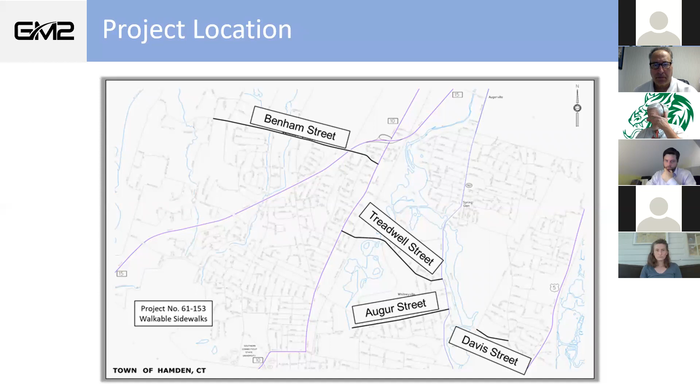So this particular project involves 4 streets in the town of Hamden: Benham Street, Treadwell Street, Augur Street, and Davis Street. A little bit of background on the project: the scope of work on each of the 4 streets stems from 2 previous studies that the town undertook several years ago. In fact, many streets were involved and studied as part of these 2 studies, including the 4 streets subject of tonight's meeting. Several projects have been initiated, including this one, as a result of the outcome of those 2 studies, and there's a fair amount of public engagement, which means we think we've got some good, sound project goals to achieve.

And those project goals include pedestrian safety, improving pedestrian safety by constructing new sidewalks where none exist today in priority locations. We also hope to improve facilities for bicyclists and some strategies for traffic calming.

So of the 4 streets, let's talk about Augur Street first. This is an aerial view. Augur Street is primarily a one-way street. The full stretch is from Whitney Avenue to Newhall Street in the east-west direction, and it's one-way westbound from Frederick Street to Newhall.

On this particular street, there are some missing sidewalks. In the lower left-hand corner of the image, you can see white stripes indicating where we would be constructing new 5-foot wide concrete sidewalks in the vicinity of Farnsworth Street, Rolfe Street, and Giles Street.

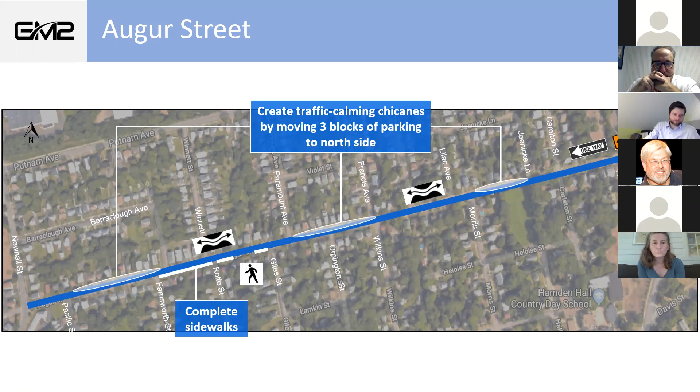One of the other elements of work on Augur Street is some traffic calming. In this case, we're interested in creating what we call a chicane effect. I'm toggling back and forth to show how we would like to restripe some of the on-street parking. The parking today is on the south side of the street, and we're proposing to restripe 3 areas on the north side.

This graphic shows the chicane effect. By shifting some of the parking to the north side and leaving some striped on the south side, we create horizontal shifts in the path of motor vehicles as they traverse east to west down Augur Street. This horizontal shift ought to help encourage slower speeds. So that's the traffic calming strategy on Augur Street.

Treadwell Street. The full stretch is from Whitney to Dixwell Avenue. On the western portion, from the vicinity of Martin Terrace to Marne Street, there are no sidewalks today. The project proposes to construct a new sidewalk on the north side in that stretch, providing a continuous stretch of sidewalk from Dixwell to Whitney.

In the rest of the project area, we're proposing what we call sharrows. These are pavement markings on the roadway in each direction, indicated by a symbol of a bicycle with 2 arrows. They're commonly called sharrows, indicating a shared lane environment, and I'll show you that in a minute.

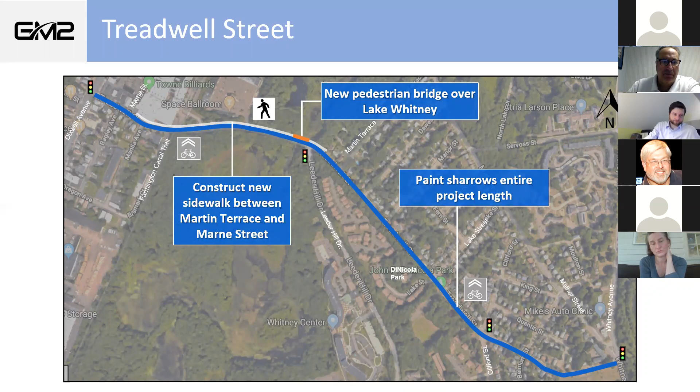I want to point out this little orange area just to the west of Leeder Hill Drive. This is an area where there's not enough room for a new sidewalk within the existing pavement area, so we're proposing a new pedestrian bridge to carry pedestrians over Lake Whitney.

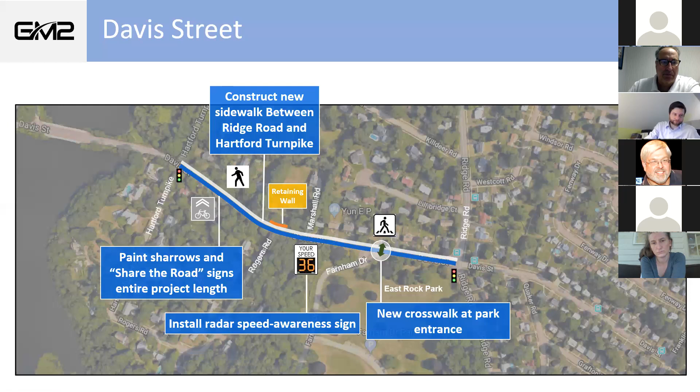We did investigate the most recent 5 years of crash data. We did not see any crashes there, but I think there is some history and concern of safety at that driveway, so with new pedestrian activity, a crosswalk makes a lot of sense.

We'd be proposing at the sidewalk location what we call rectangular rapid flashing beacons, or RRFBs. You may have seen these in other municipalities, or even in Hamden, but they're fairly new. In the past several years they're being installed at mid-block crosswalks, where a crosswalk doesn't have the benefit of a traffic signal, and the law requires drivers to yield to pedestrians in the crosswalk.

These flashing lights are activated by the pedestrian, so they're not flashing all the time, and they've been found to be very successful in increasing compliance with the yield-to-pedestrian laws. So we propose those to be installed at that crosswalk location.

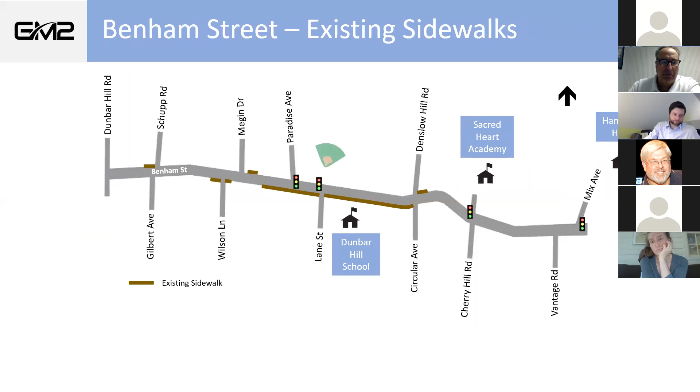We did an investigation and a study, and had a public forum a month and a half ago. The town recommends the new sidewalk on the south side in that stretch, and then there's another small section near Dunbar Hill School on the north side, opposite Lane Street. There's an existing crosswalk that appears to serve that athletic field, so we're proposing a little new stretch of sidewalk to receive pedestrians at that crossing.

Today, Benham Street does not have striped shoulders, just a double yellow line. So we would stripe the 5-foot wide bike lane, leaving 11-foot travel lanes eastbound and westbound, which conforms to standards for this type of roadway. We think that would have some traffic calming effect - the appearance of a narrowed roadway with that white stripe and the exclusive bike lanes.

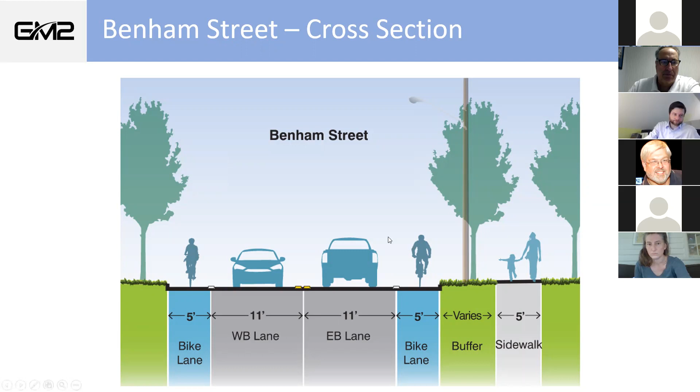And these 5-foot wide bike lanes, one in each direction - we can fit the bike lanes for the most part between Dunbar Hill Road and Mix Avenue. We're going to have to do a little bit of widening right around Cherry Hill Road - just not quite wide enough, there's a little pinch point - so we're going to widen the roadway a bit to have those 5-foot wide bike lanes be continuous.

Now, when we get to Mix Avenue, the stretch between Mix Avenue and Dixwell Avenue, there is not enough roadway width. So we're proposing, rather than exclusive bike lanes, these sharrows on the pavement markings, providing improved bicycle facilities the full stretch between Dixwell Avenue and Dunbar Hill Road.

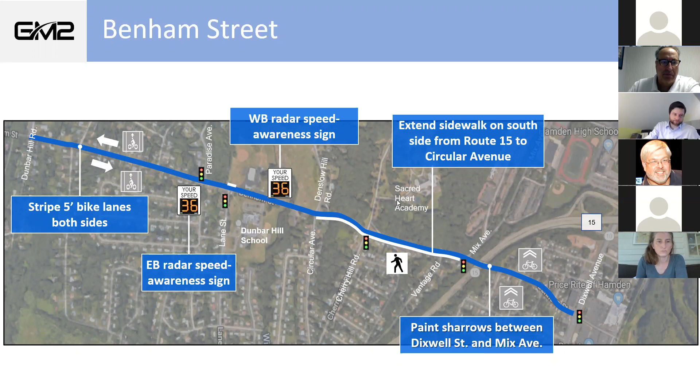Similar to Davis Street, we're proposing these radar speed awareness signs, one for each direction. We're suggesting they go at the approaches to Dunbar Hill School, a very sensitive area for pedestrian safety for the school children, so that's what we're also suggesting for some traffic calming.

So I've covered the 4 streets and a little bit about property rights. The vast majority of the work will be accomplished within the town-owned rights of way. We do have several locations where it appears that while the sidewalk work will be on town rights of way, because of the topography in certain areas, we think the town will have to acquire some slope easements. Primarily, these are easements where we're going to have to change the topography to fit in the sidewalk. So it's not an acquisition of a fee taking of property, but an easement.

Anyone who is interested in their particular property, I have highlighted which properties are on some colored plans, and I believe they've also been posted on the town website. I can go over that in a minute, but I need to read you this information first.

The process of acquiring property under a federal aid project, which this is, needs to conform to what they call the Uniform Relocation Assistance and Real Property Acquisition Policies Act. It goes all the way back to 1970. So that's the federal law, often just referred to as the Uniform Act. The Connecticut Department of Transportation, CTDOT, will be providing oversight of the town's rights-of-way process, because the federal funding is being administered by Connecticut DOT to the town of Hamden.

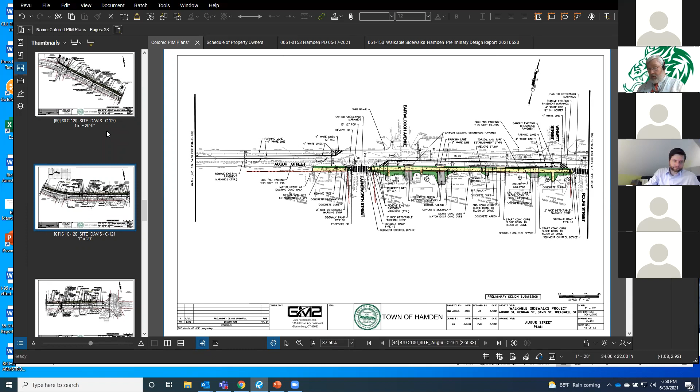Second one is Mike Mendelson. I am writing to express my support for sidewalks on Davis Street as currently presented. I think that sidewalks and a crosswalk to East Rock Park are sorely needed. That's what Mr. Mendelson gave.

And we just this afternoon received another letter. Mr. Austin, I am writing regarding the proposed sidewalks on Benham Street. We strongly oppose said walkway on our property. We work hard to maintain our property and do not want to lose our fence and our plantings. It is very unfair that after over 25 years, we now risk losing the fence and gardens we invested in to accommodate imaginary walkers. The biggest foot traffic we see is the Sacred Heart students running on their side of the street.

Due to high unsafe traffic, children do not generally walk to school in this area. Sidewalk or no sidewalk, with the speed at which people drive, it is very unsafe. Secondly, you are putting an additional burden on taxpayers to clear ice and snow at risk of being fined. Hamden does not do a good job of maintaining the existing sidewalks, so let's not add to the unmaintained sidewalks in this town. This $3 million would be better spent on crime reduction and enforcing traffic laws. I am sure you don't care about what long-standing taxpayers want, but we do not want this on our property. Our taxes go up and we get things forced on us we don't want, and the things we need are ignored. Also, our gas line to our home is where the sidewalk would go. Please place the sidewalks on the Sacred Heart side and leave the residents alone.

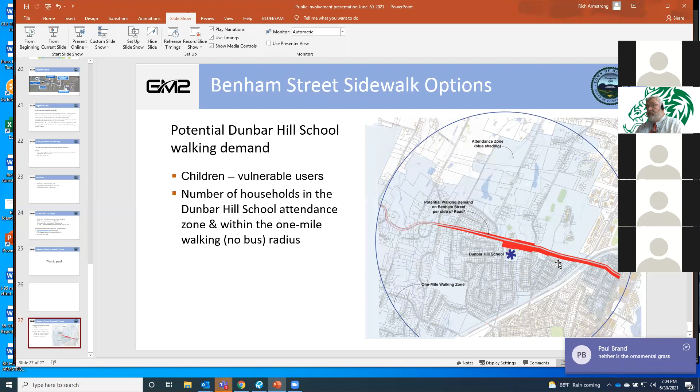So we did this study, I don't know if hopefully you can see this graphic, let me pull it up. So this graphic here, the red band, this of course is the south side of Benham Street, and then the red band on the north side of Benham Street. This large geographic area is the walking zone, the 1 mile walking zone for students at Dunbar Hill School. I think it's an elementary school, young students, and they can't take a bus, they're either going to be driven by a parent or they're walking.

So the desire, or the demand if you will, is indicated by the band width, that red band, and there's simply more residences, households on the south side. You can see it's less populated on the north side, and these bands are proportional to what one would expect, the volume of pedestrians on which side of the street. You can see there's a greater demand on the south side.

Now having said that, that was but one consideration, but I think it's an important one, because school children, whether they're driven now or whether they're choosing to walk, or whether they will choose to walk when sidewalks are constructed, we believe the greater demand is on the south side. So that was a strong consideration.

But excuse me, there are bus services to Dunbar Hill from this location. I know because I live here and I watch the buses pick up the kids. They don't walk from Vantage Road to Dunbar Hill, they take a bus, or their parents drive them if that's what they choose. There are no walkers, they're not required to walk here. So that doesn't even make any sense in this area.

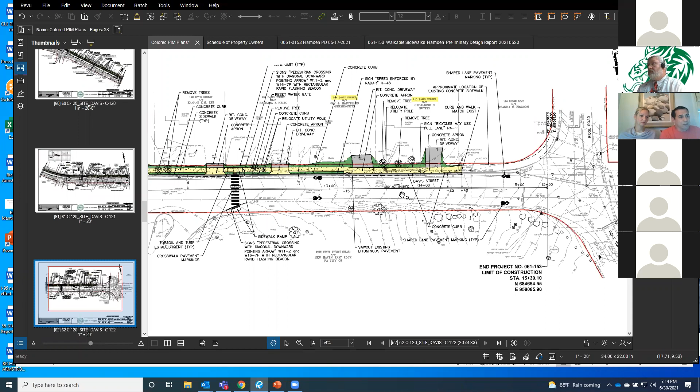So to put a light, which would end up, by the way, directly in front of my house on Davis Street, with a flashing light for someone to cross versus a red light at an intersection that gives a walk sign for someone to walk across, does not seem to make sense to me. The rapid flashing beacons seem fine for an area where you can't cross at a light, but you have those options at Hartford Turnpike and Ridge Road.

Last meeting, we talked about one of the holdups being paperwork needed to build sidewalks in a park. It seems like we've had plenty of time to put in that paperwork, and it sounds like we still have time. I am proposing that it is certainly not equitable to put in a sidewalk impacting 12 homes with half the lot size versus 4 homes with literally twice the lot size. 8 of those 12 homes you're impacting are a quarter acre or less, and that doesn't seem very equitable.

We also talked about, I believe Richard had said off the top of his head, and I wouldn't hold him to it, that the cost between the north and south side was about the same. I've lived here now for 15 years. Traffic is - people drive extremely fast on Davis Street. You're at a hill in both directions to cross into the park. We literally do it almost every day during COVID to go for a walk in the morning, did it this morning. It's a great location to live, but to have to cross directly where cars are coming up hills and can't see you is very, very dangerous. I would propose the sidewalks go on the south side, impacting 1/3 as many houses, and would ultimately be safer, where people would cross at intersections where the lights turn red and have a walk or don't walk sign. I don't know if you wanted to add anything.

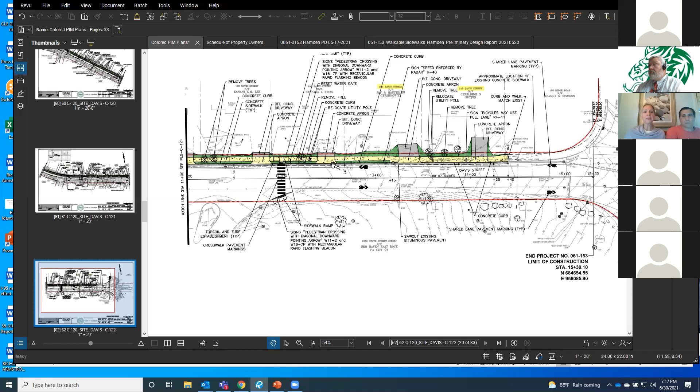Those 12 homes are also substantially smaller with smaller lot sizes. So you are significantly devaluing homes from people of lesser economic means, while also privileging those precious 4 homes with economic means. In no way is this plan mindful in terms of the growing disparities and wealth gap that already exists in Hamden. Please be mindful in terms of thinking about equity, and also trying to be as least disruptive to as few homes as possible.

There is a park across the street. Wouldn't it make more sense if the sidewalk was on the same side as the park? That is where people are going. You have natural places where you can cross at the intersections where people cross anyway.

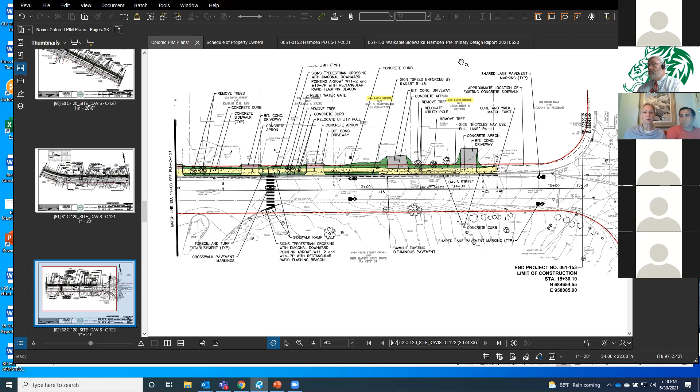I'm also a runner and a cyclist, and I go all the time running on Waite Street, and there is a crosswalk on Waite Street. And yet I've also been almost hit by a car twice because of the same reason, right above the hill, near the soccer fields. It is extremely dangerous, just like Davis Street.

And I tell you, even with the crosswalk, and even if you had a bright, shiny sign, drivers don't necessarily stop. If they are stopped at a stop sign, they have to stop. So when you're thinking about safety, thinking about the types of cars that drive on Davis, it is a major throughway, as you know, from State Street to Whitney Avenue.

And my children take the bus, and we are very mindful of where they get dropped off to make sure that they're on the side of our house, because they cannot cross the road—even when our bus signs have the stop sign, people go through it all the time. It is extremely dangerous. Please, please don't endanger the public, and please don't further disenfranchise people who do not have the economic means. Thank you.

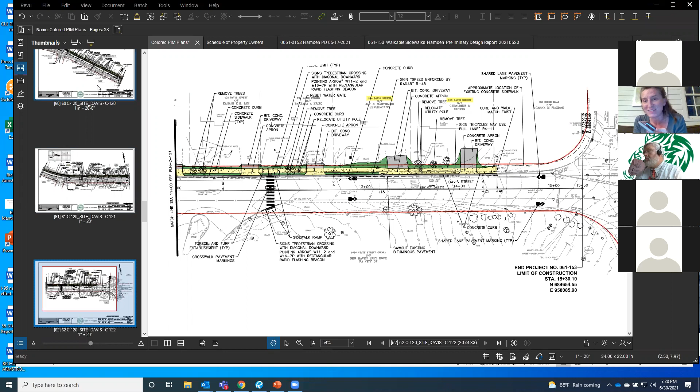I wanted to say that I'm a new homeowner on the corner of Davis and Hartford Turnpike. I'm on the north side of the street, and I'm glad to be meeting my neighbors here tonight. So I'm in the property that's marked Neumann. The map was made before I arrived.

In addition to the really important issues that were raised about safety getting to the park and equity, I wanted to raise some neighborhood concerns. One is about the traffic noise, and another is about the feel of the neighborhood. Both of these things, I think, depend partly on the shrubbery and trees that people have thoughtfully put into place to help manage the noise and keep the neighborhood beautiful.

I noticed that the plan involves removing 6 shrubs right next to my property and 2 trees, and that it continues along the street removing greenery. I think that would be too bad for this neighborhood, which provides a sort of archway visually to the park. Also, I think I, like my neighbors, have noticed the trucks hurtling through and other fast-moving bikes and things hurtling through at all hours, especially in the middle of the night. And they're loud.

For people whose fences will be affected, but also for those of us hoping that the greenery absorbs some of this sound, I'm not hearing that this plan is helping with traffic calming in our area very much. I'm not fully understanding why trucks are hurtling through at 2, 3, 4 in the morning—I'm routinely awoken by trucks hurtling along the uneven road, making a lot of noise. It's true on Davis, also true on Hartford Turnpike, but it seems to come a lot from Davis Street.

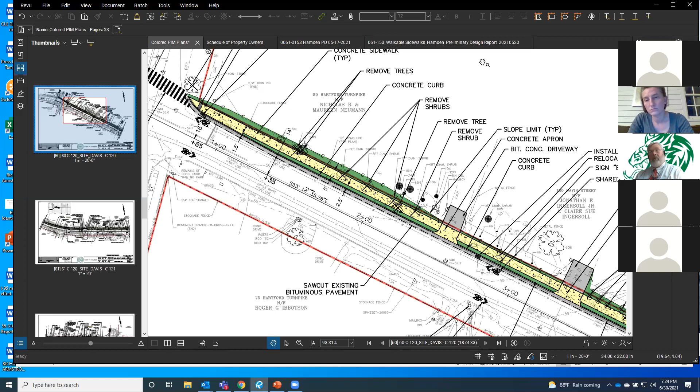Traffic, we do hear very loud and clear. The traffic authority is looking at this street, and we are looking at truck traffic. It's not an easy or quick answer. This is the only east-west corridor we have in town, so this isn't a good answer, and we don't have a great suggestion yet. We're working on it, that's the best I can do right now. I know the traffic authority is looking at it. We did look at it, and it even went to council, and council sent it back because this is the only east-west corridor. There's nothing to the south until New Haven, and nothing to the north other than purely residential roads.

until you get to Hartford Turnpike. They've cut Skiff Street off, and all the others are more circuitous. I don't have a good answer, but we are looking at it. There's a study out there commissioned right now. I hope that answers your questions, though I understand you may not find them completely satisfying. Keep in mind Route 8 is my back line too, so I hear motorcycles and trucks, and there's never going to be anything I can do about it.

Could you directly address which side of the road was selected and why on the Davis Street area? For all of them, the predominant reason was the study itself. The studies put it on Benham Street, on the south side, because that's where the majority of the users, meaning the collected area, were.

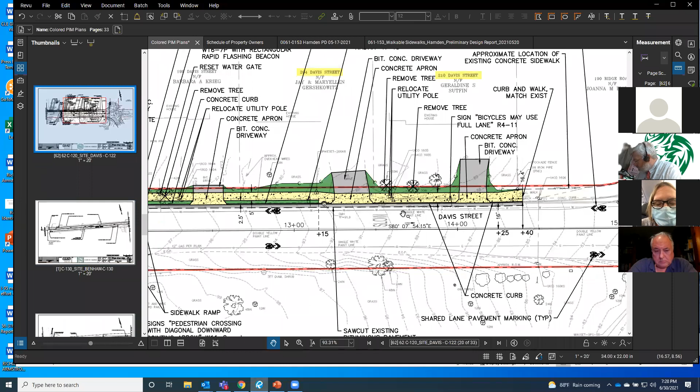But the other issue I wanted to bring up was the intersection at Ridge Road and Davis, where it's an inefficient light. There's a lot of waiting that doesn't need to go on. Cars coming from Hartford Turnpike south can actually turn right if a right turn arrow is added to that intersection. Also, I wonder if crosswalks can be added with lights, since there are lots of pedestrians using that intersection. It would be extremely helpful to connect our neighborhood with Whitneyville. Thank you.

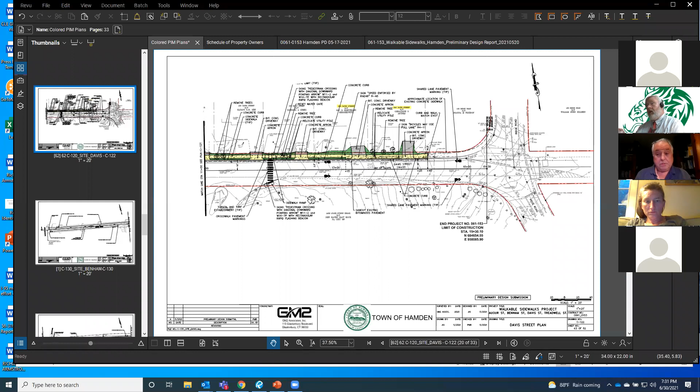There's a swale that comes down from the park, and that drains part of the park and comes next to his property towards Davis. So the first thing you need to do if you're going to do a plan like this is remediate that to the current standards.

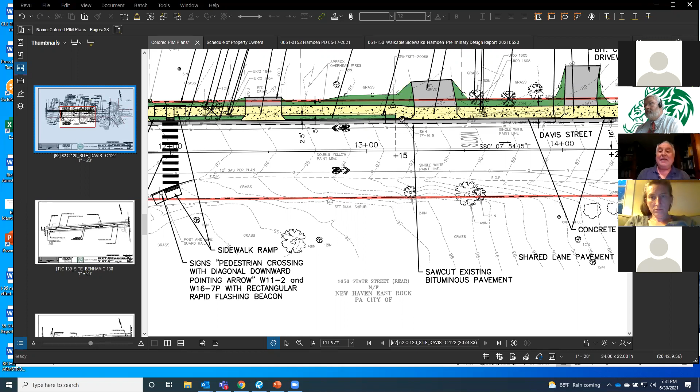Good luck getting New Haven to do their proper part of that, because they built all those parking lots up on East Rock. It all drains—they actually changed the drainage, if you can imagine, toward the reservoir instead of toward the Quinnipiac. But that's the kind of thing, and if you want to squabble and fight with New Haven, we could put this project back 5 years. So let me just say that.

There are a lot of impediments. The engineers have looked at this, and they've tried to balance the difficulties, equities, and costs. There are a lot of difficulties wherever these sidewalks are routed, but to run it on the south side is going to be extremely difficult. So if people don't want this project, you can try running it on the south side. That's all I have to say. I have a lot more to say, but in the interest of others, I'll be silent here.

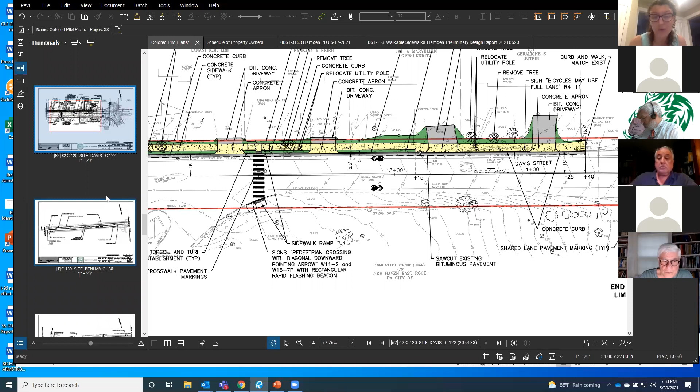We've moved into the property that was the Ortmans, so we're at 129 Davis Street, one of those 4 properties on the south side of Davis Street. We moved here from Cambridge, Massachusetts, and we've got 2 very young children. We love living here and are very glad to be part of the neighborhood now.

I would echo what's been said about traffic and traffic calming. If there are going to be more people crossing, and we see a lot of people running up and down the road, the speed of the trucks and lorries that come past is very worrying. We would be very glad of a proper crossing at the turnpike so we can get to either side of the house. Unless we're coming out in the car, and even that's a nasty junction sometimes, it's not very safe to get the children out and about.

So that's probably what I've got to add. I don't know enough about the plans yet, I'm just getting up to speed on the details of what's on what side. But in terms of concerns about traffic speed, vegetation, and littering, those are all things we experience very much too. We'll try listening and learning to what's going on, but for those of you I haven't met, we're glad to be joining you. Thank you very much.

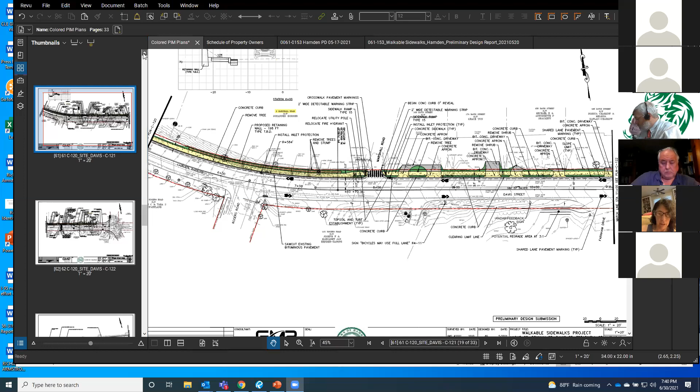Ms. Ward, I believe I had you next. A very quick question, I apologize if you covered this, I had to tune in a little bit late. I'm concerned about the intersection of Hartford Turnpike and Davis. If you're walking from Whitney over the bridge, it's really terrifying to try to turn right because there's no sidewalk in that last stretch on the south side of Davis. And if you're on the other side, you have to cross, and there's not a real pedestrian crosswalk. So do you already plan to have some pedestrian crosswalk there for that corner, the south side?

On the north side, there's an existing bituminous sidewalk, not great. We'll agree with you on that one. On the south side, if you want to turn, there isn't one. If you're on that sidewalk on the north side of Davis, going up to Hartford Turnpike from Whitney, you have to cross in order to walk in that neighborhood that you turn right off. You turn right on Hartford Turnpike to walk in that neighborhood, you have to cross that intersection, and it is terrifying.

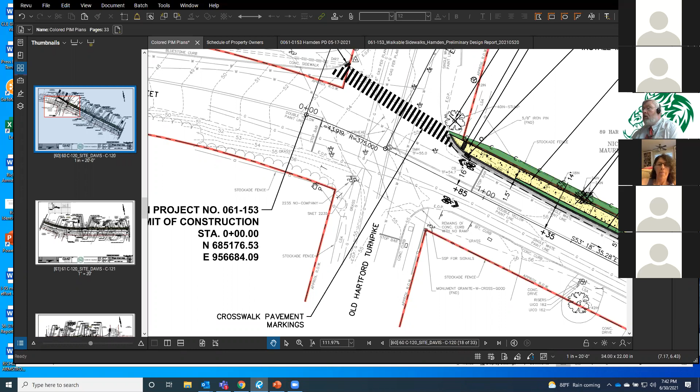And I just wanted to know if you'd have a walk signal there as opposed to just a stoplight, if you're proposing that. If we don't do it in this project, we will do it in the next. There is another project that I have also earmarked looking at Hartford Turnpike and calming on Hartford Turnpike and Ridge. I am hoping that the council passes a capital program that is hopefully going to be before them shortly. If they do, between this or the other, we will be looking at replacing that light. I don't know if the replacement of the light is here, but we're going to replace it at least in the next one. So it's not proposed in the project you're talking about tonight.

Rich, do you have that in ours? The challenge we have is that the signal equipment appears to be extremely old, and unfortunately the challenge is we may not be able to upgrade that existing equipment. We still have to make that final determination. If it's found that that existing signal equipment cannot be updated or upgraded because of its obsolescence, it's very, very expensive to put brand new signal equipment in, so it may not fit within this particular project budget. But as Mark said, I think his other plan would be to pursue other funding sources to be able to do that, so it's to be determined. Ideally we would have all the crosswalks and the PED signals, but we have to do a final evaluation of the existing equipment and see where we are.

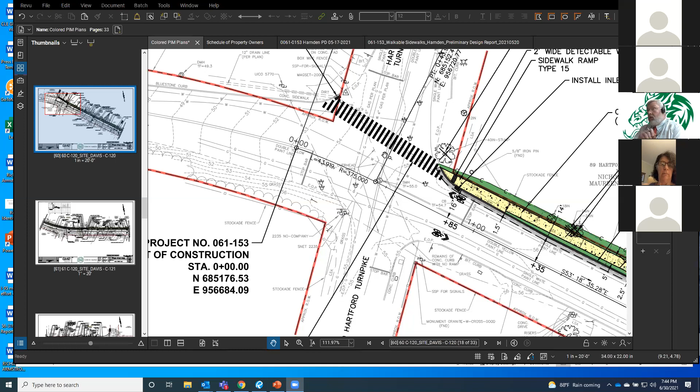We're working on it, we're chasing grants. I do have what's called a LOTCIP grant, Local Transportation Capital Improvement Program, that is looking at Hartford Turnpike and Ridge. That's another project this neighborhood will see, not immediately, but hopefully soon. So that I deliberately put this light in there if it's not addressed here.

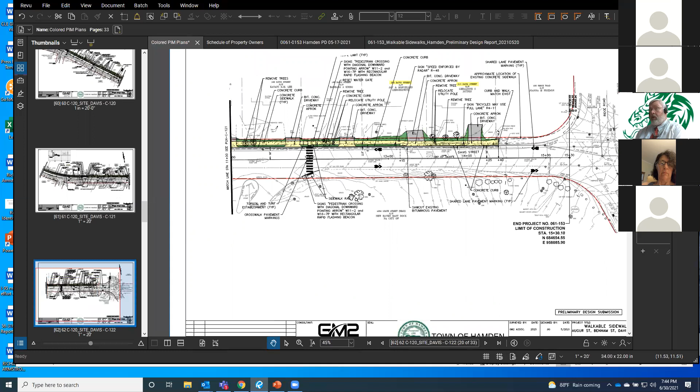And I did have two questions, I did not miss them. The park itself is owned by New Haven. It physically resides in Hamden, so it is considered part of Hamden. It is owned, the ownership of that park is New Haven, so that is correct.

Can I just ask a technical question? We can try. Earlier, Richard mentioned that he had highlighted properties that potentially required slope easements. Could you, Richard, please explain how you highlighted them?

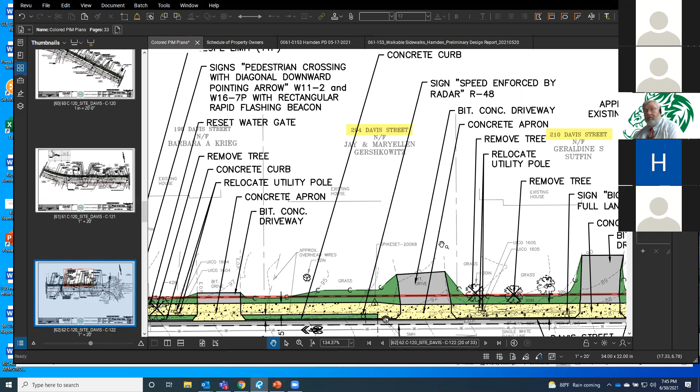Yes, sir, are you on Davis Street? I'm sorry, I don't recognize you. Yeah, so Mark has put on the town website these colored plans, so you want to look for the colored versions. For the properties that we believe will need some sort of slope easement, I've highlighted the street address. Hold on please, can you see my screen?

Yes, can you go over to 140 Davis? 140, okay, bear with me please. I'm looking for a street address, I'm not quite there yet.

Certainly, you can ask any questions, I'm happy to help out. So 140, yes sir, if we look at your property, under this proposed design you can see the sidewalk, you can see the topography. You have a steep slope, fairly steep slope. I know that, yeah.

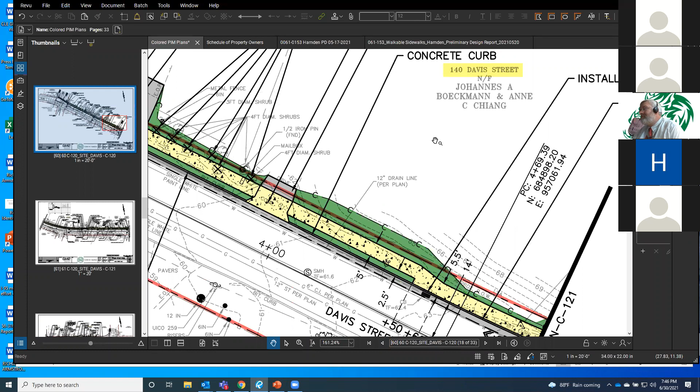You can see this line here that says C, that's the approximate cut line. So in order to build the sidewalk, we're going to have to cut into your property a little bit to fit this level area. The sidewalk will be level and then slope back up to meet your existing property grade and topography. So it will be regrassed, but it would be cut down lower than it is today. It might be steep enough that we need to get onto your property for construction purposes, and that would be a temporary easement somewhere in the vicinity of that line.

So once we're in final design, with this proposal, I was surprised to see that it doesn't mention any shrubs to be taken down, because there are shrubs or rhododendrons right in this area that we're looking at. Okay, all right.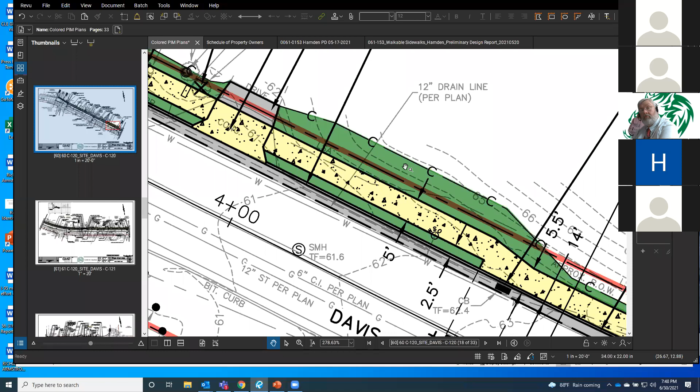So Mike Marzi can help answer this question. If and when the need for the easement on your property or anybody else's arises during final design, a property map would be prepared showing the exact easement area, and a property agent from the town would come out and meet with you, walk your property, and you can help them understand all the features that may not be depicted on this map. So there'll be an opportunity for you to give clarity on things like vegetation that doesn't show up on the survey map.

But you can see there are some trees, and also in that area is a water shutoff for the water supply. Okay, and I see a W in that plan. Yes, that's typically the water supply, easily 3 feet down, and I assume that will be maintained and taken care of.

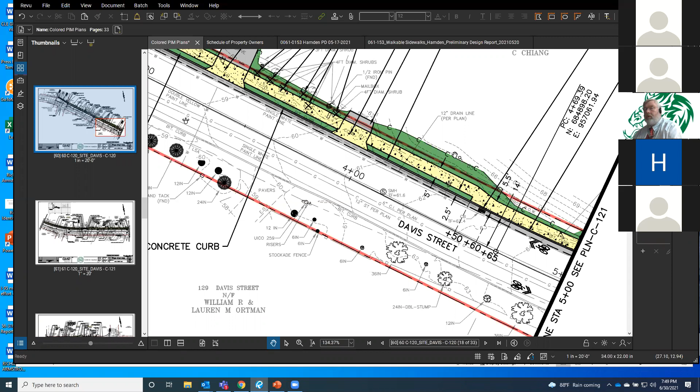Yes, absolutely. Someone else expressed concern about a gas line, I believe this was on Benham, and the gas line is easily 18 inches down. It's not common for us to encounter utilities when we go through, occasionally it does happen, but it's uncommon. If that's the case, we will relocate it at no cost to you, because that would be part of the construction.

I did also notice, Randy Teal, you could not see the plans easily because you're trying to look at it from your phone. If you go to hamden.com, you can go to the engineering tab on the left-hand side, scroll down, and there is projects. Under projects, it's close to the bottom, it's Walkable Sidewalks 61-153, that's where all these attachments are. So I hope that addresses your concern about the ability to see the plans and review.

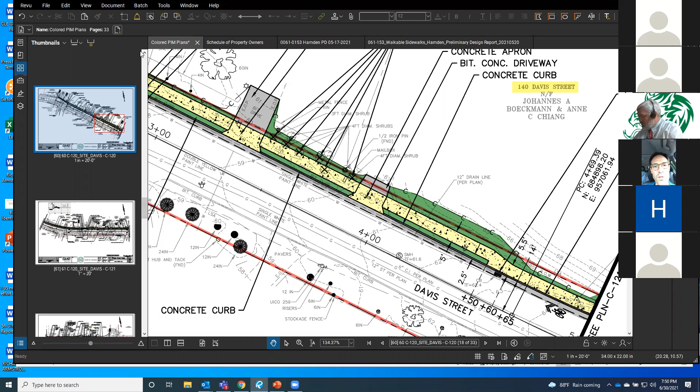Oh no, it's okay, but can I ask an easy question? Please. So back on the Hartford Turnpike and Davis intersection, I heard the conversation about the light being difficult to change, which I understand. There was a crosswalk on the drawings crossing Hartford Turnpike. Would it be possible to put a crosswalk crossing Davis there? Because I will echo Helen's comments that is a death trap of an intersection.

Yes, it's not always done. I don't know if that would require a change in the signal equipment, but a crosswalk the other direction would also be very welcome.

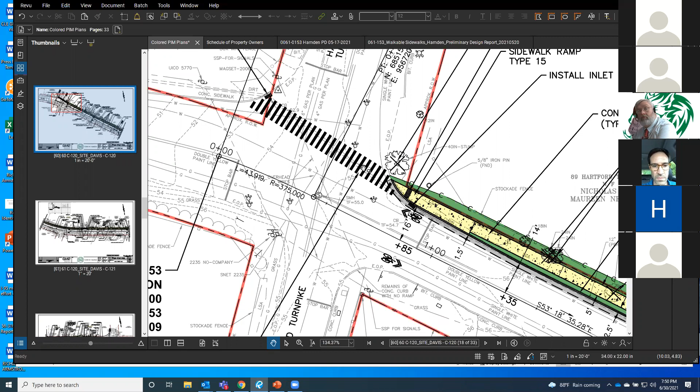Yes, that's a good comment, and we did talk about that. Hearing it from you and others emphasizing the importance of improving pedestrian crossing safety, we'll strongly consider that. I think that sounds like it makes a lot of sense in this circumstance. Thank you very much.

Also, when it comes to traffic calming, there are other grants in this area. I know there's been much concern about the traffic calming we did up on Ridge Road. That was very concerning to a lot of residents. It's not part of this project - it's actually just off most of these maps.

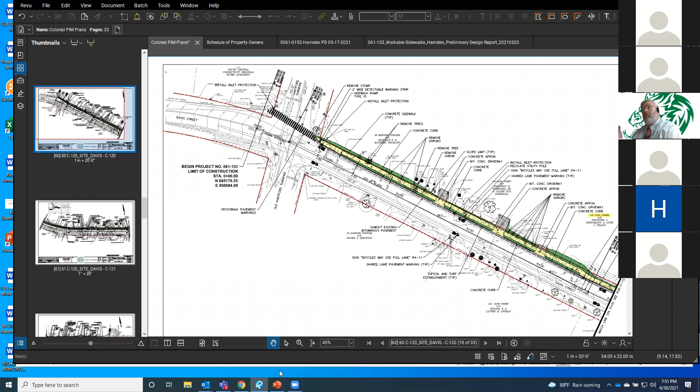We will be coming to you in the future for Hartford Turnpike and Ridge. I'm going to come to the residents even before I bring in consultants so that they can come in and bid on that project with those comments in hand. It's the same bundle of reports that have made various recommendations in this area, so we are looking at that.

There is also another project on the other side, a much longer term project. We are looking at creating a Mill River Trail. Currently New Haven is beginning on the Mill River - they started at the Sound, just finished phase 1, and are now doing phase 2 coming up the Mill River. There are about another 8 to 10 phases here in Hamden that we are looking at.

One of them crosses Davis, and this would be at the old River Street or River Road. That is another phase, purely conceptual at this point, but there would be traffic calming as part of that down in that area and that other park near Whitney. So we are looking at this.

We are taking this very seriously. Your concerns are very valid - they do fly through here, no question. So we are looking at traffic lights at Hartford Turnpike and Davis. We want to replace that light; it's old, and I don't know if we can get parts for it anymore. We do know we need to replace it - it's just a matter of where the funding is going to come from.

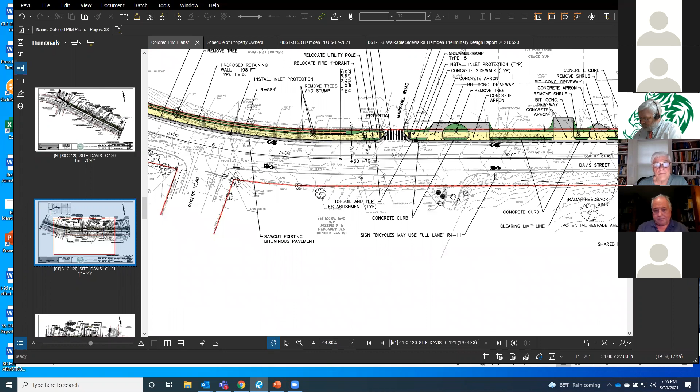But of course, the crosswalk further to the east would supplant that. Now, as to traffic...

No through traffic is a very weird thing in Connecticut. I've been on planning commissions in Vermont, and I've also lived in New Jersey, where if you have no through traffic signs, the police will stop trucks every time they go through and say, where are you going? But apparently in Hamden, they say, well, we don't have probable cause because how could we know where they're going? And if you look it up, getting a no through traffic designation is a nightmare in Connecticut.

Apparently the truckers have shut this down. And not only that, but the town of Hamden did not have a sign on the Ridge Road part adjacent to State Street. Of course, that created a million bad habits because truckers need to save money to make a living, and so they will go through anyhow.

And there are construction projects where in New Haven, they're picking up materials at Modern Materials in North Haven and going to New Haven. Every one of those is a no through trucking violation. So this has not been stopped.

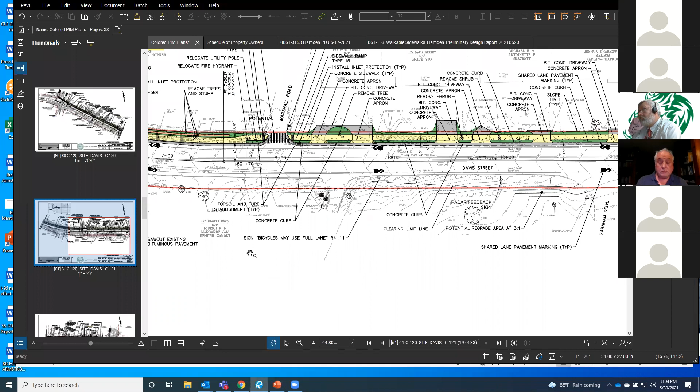Yeah, but you're removing our grass, our trees, our shrubs. That's correct, on properties. I have the property map up right now. 0.23, 0.29, 0.24, 0.25, 0.24 acres, you go through those. There's one on that side that's a full acre, 1.09. On the other side, Joseph's house, 0.57, 0.71, 0.63, 0.61. You're taking away grass, trees.

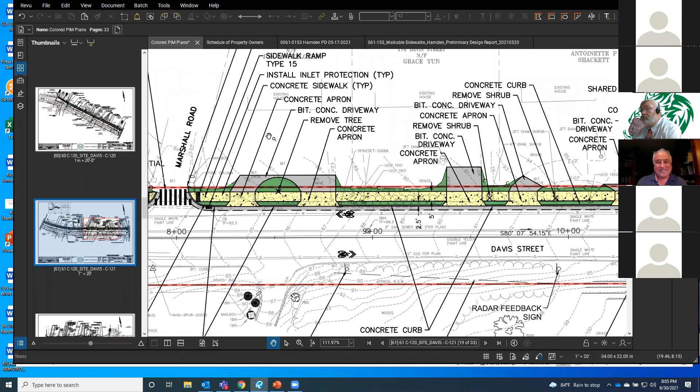We're not taking away land, sir. You're taking away the grass, the trees, the sound dampening, you're taking away all of those. We are closer to the street than every one of those other houses. I understand the land is not going away, but you're putting a sidewalk there. You're taking away my grass, you're taking away my trees, you're taking away land that my children play on. They already have a smaller piece of property, and you're making smaller pieces of property for children to play on.

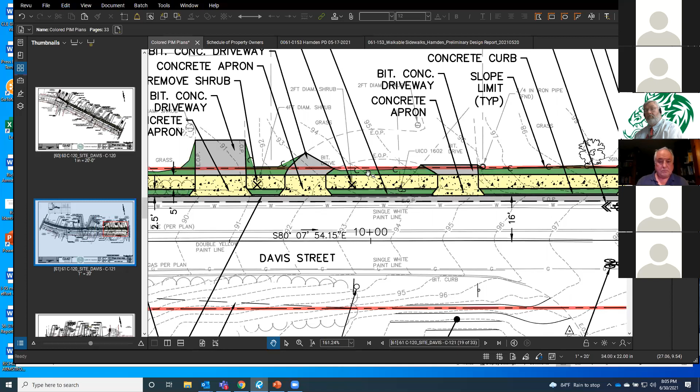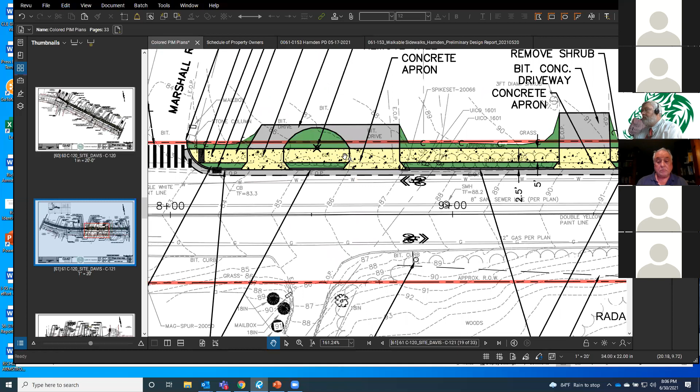So this is Rich. This is a good example, and to their point, there's going to be, let's be honest, loss of trees and vegetation along the edge of the road. The red line is the property line, the rights of way line, so that's going to be disturbed and impacted too. They're concerned about the loss of vegetation, some of which may grow back, but you also have a new sidewalk where one doesn't exist today. We appreciate the concerns about the impacts, and that's quite often, unfortunately, the case with projects like this, where to gain a new public asset of sidewalk which many people will enjoy, there are some impacts on the other side as well. Your points are very well taken and very well respected, and thank you for expressing them to the town and to our team.

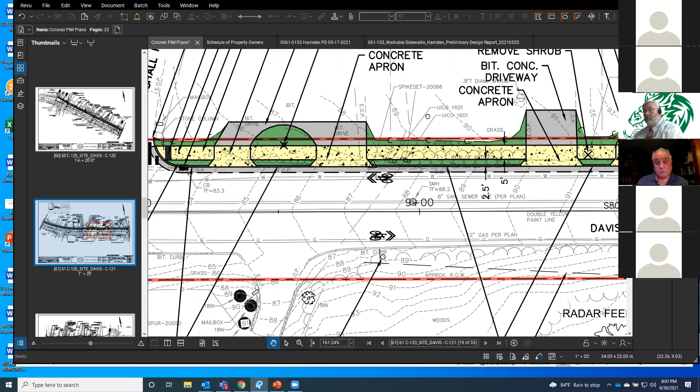So, if you have any questions about the particular impacts, I'm showing this graphically. And you're right, it's a very beautiful, narrow road, residential, with a lot of greenery and mature trees on both sides. But I think, to Mike's point, maybe the good news is it could be a lot worse, and we're going to do our absolute best, whether we're on the south side or the north side, to minimize those impacts.

Thank you for bringing this to our attention, the team's attention. We are willing to replace vegetation if we do need to take it down. We can work with you to try to relocate it, or to replace vegetation. Ms. Feinberg had mentioned earlier she's concerned about both trees and evergreens, and we're definitely willing to work with putting additional vegetation back.

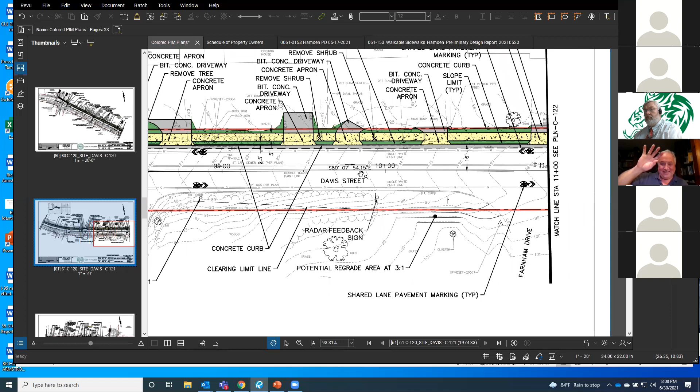I would just like to see a concerted effort to consider taking a look at the other side of the street to place the sidewalk where there's least impact on people's properties. It's a difference - it has 4 houses compared to 12. And that is exactly where the park is, that's where people go to play. Please consider taking another look at the park side. It has the least amount of impact, especially on people's homes who have smaller pieces of property on the other side. Please take the time to reconsider.

I do believe Joseph would like to weigh in, being one of those owners.

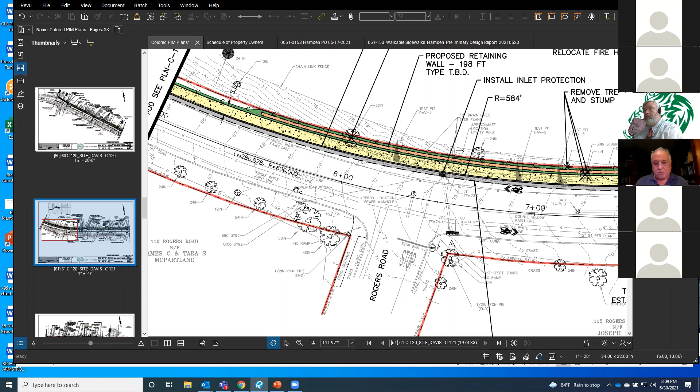Some people aren't going to like this, but I have to speak to the equities argument. So therefore, the smaller your property and the less taxes you pay, you should have the most weight, because it would have the biggest impact? This argument, like I said with the church, has issues. Further, the 4-to-12 ratio is because of the park. There could have been buildings of the same pitch of lots all along the park, and then you could say, well, it's 12 and 12. So there's somewhat of a flaw to that argument.

So frankly, this is going to be negative, whichever side it is. I will say, by the way, that in terms of a taking or anything, it's in the right of way - that's why the streets have right of ways. It will impact one side or the other, but I am quite sure that the engineers took this into account.

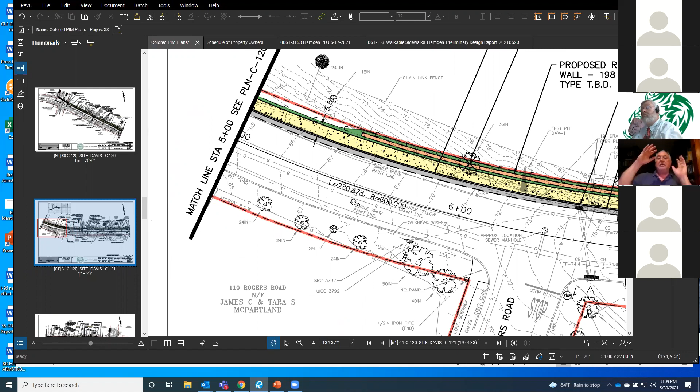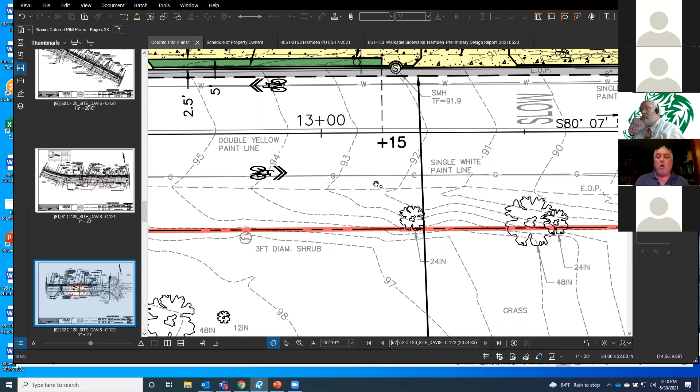And I have to reiterate that that is the town of New Haven property. If you think New Haven is functional, if you think that park is functional, if you think you could get New Haven to agree to spend money and remediate their inherent problems - because it would have to be addressed with a new project - that drainage, that swale, which I don't think is on the maps, was a big sneaky deal. You could not do that under current zoning at all, but it was done, and it would take a lot of money to remediate. The idea of having a giant parking lot pouring into a reservoir through that swale is a nightmare. So like I said before, and I think the engineers would agree with me, if you want to put this back 5 years, you could.

What happens in the meeting? Okay.

We are hearing quite a bit of argument from both sets of neighbors here about which side it's going to be on.

Could I just add something to my previous comments, please? Yes ma'am, I understand you're speaking about Benham Street. Yes, and I did see the previous comments that you put in the chat. Thank you, by all means. I had actually spoken to the surveyor when he was out here, and he told me, well, you really don't have to worry about it, because with all the utility poles on this side, it would make much more sense on the other side. So how are the engineers justifying coming on this side when the surveyor even said the other side was the logical choice? I don't understand that.

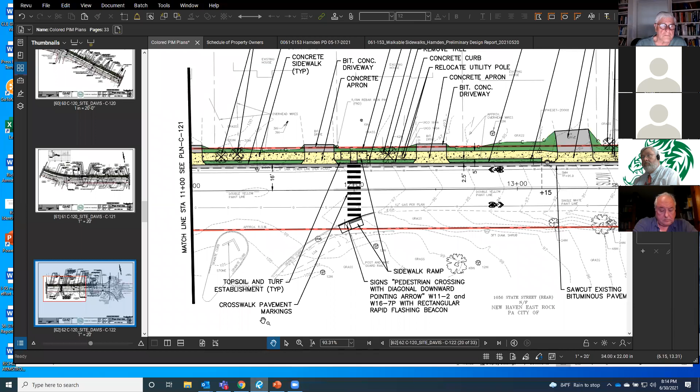But we also recognize... So what are, can you show me the exact plans for what they plan on doing with my fence? As far as the matter, would you be so kind as to remind, while he's calling up Benham Street, what is the number please, so that he knows? Oh, it's 180, it's 186, I'm on the corner of Vantage. Thank you very much, we just want to make sure we're getting to the right place. I'm just curious as to what they're planning for my fence and my property there.

No, we understand it, and please understand when I say it's not your property, we all kind of view what goes right up to the edge of the road as our property, where in reality...

Rich, let me make one correction. The town owns very, very little roadway. We have a right of way that we control for the betterment of the public. So you're both actually correct.

The property is technically, if that road was to be closed and abandoned, it would go 50% to either side. That's right, that is the way it is actually written. The town does not actually own streets.

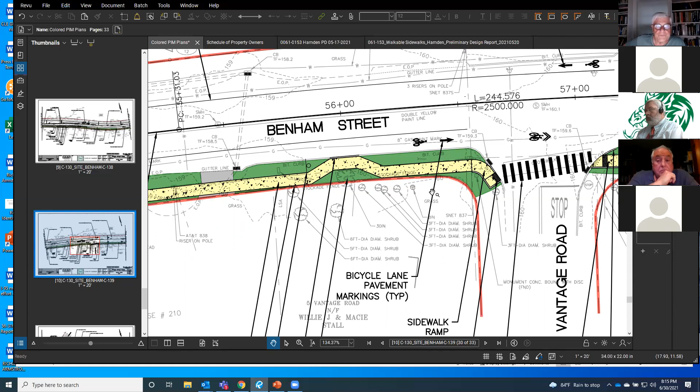We're not property owners of the streets. That's why the liability of the sidewalks and the snow clearing goes to the owners of the property. So that's a technical thing. It's a little difficult, but more importantly, the town does control the right of way very specifically for public use, for public pass and repass, utility work and such.

I know you're both correct. Yeah, and it's a very common thing, but I've been assured by our lawyers we do not own the roads. Yeah, that's right, I want to be clear. I apologize, it sounds like a technical, legalese thing, but I just want to be accurate and clear. Yeah, I mean we're here to try to clear up as much as we can, and I apologize for that. No, that's right.

Rich, I believe it's the other corner. Oh, I'm sorry, yeah. Okay, yeah, there's my corner. Yes, so you're right here, this is your property.

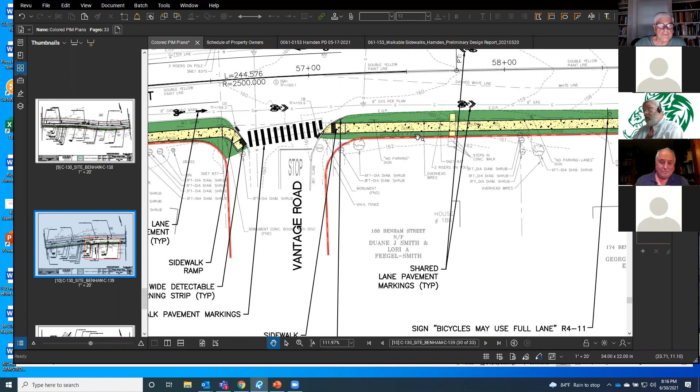And I believe you've also been hit from multiple directions because there is a nasty curve. You and I have actually spoken about the curve to your south on Vantage itself, and she is not joking about it, they have gone through rock walls, they have rode up on rock walls, they have knocked out multiple cars in her driveway. We've had this conversation, she is not barking up the wrong tree, I can assure you she is completely correct.

I'd much rather see the $3 million be spent on something with the speeding cars and the cars that come through and destroy my property. So she is very, very correct, I've had multiple conversations, I've seen the accident reports, I've seen the pictures, she's right.

And she gets hit from both directions, most often up Vantage. You wouldn't think so, going uphill, she's been hit more and lost cars over this. So her concerns are incredibly valid.

Thank you. Thank you for acknowledging that.

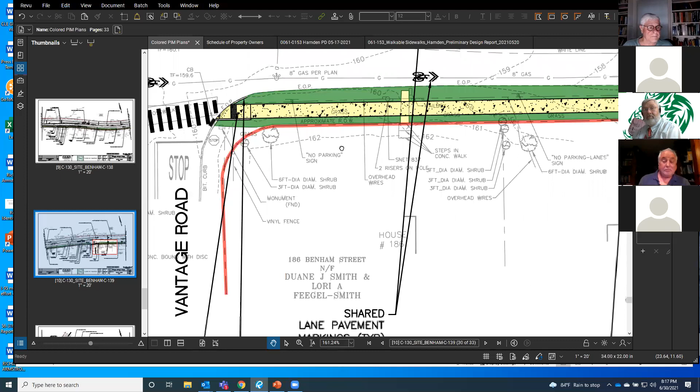So hopefully we're looking at the right property, and you can see where the new sidewalk would go. This EOP, edge of pavement, is the edge of road, and this is called a grass buffer strip. You can see there's a utility pole right there, and we're able to go behind it. The red is the right-of-way line, so it looks like we would have to reconstruct what looks like a little walkway that you have today, going out to the mailbox. I believe her fence is on the corner.

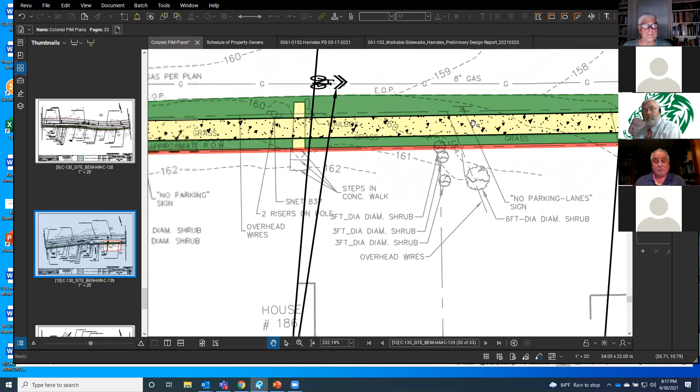This is Paul Brand from GM2. Just to address the question regarding the fence, we're not actually proposing to do any work that would relocate that fence or touch the fence, or the ornamental grass you talked about earlier. Even on the Benham Street side, there's a short 8-foot fence section there. You can see where his cursor is - the green just represents some reseeding that we do. They'll have to strip down the ground to put the sidewalk in, dig down probably a foot or so to put the base for the sidewalk and then the sidewalk in. So we usually just show a little grassed area around that to represent there'll be some reseeding around the sidewalk, but for all intents and purposes, we won't be changing the grade through that area.

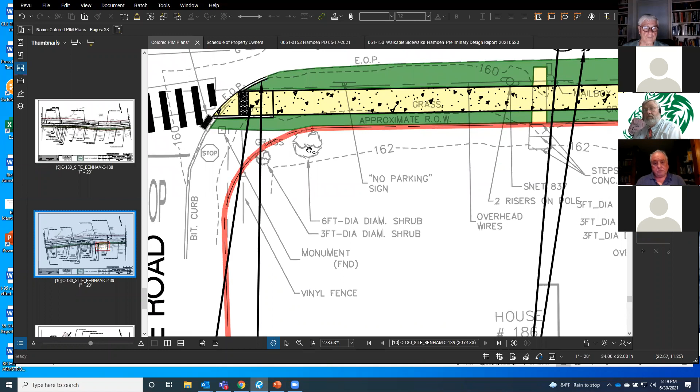I don't know if I'm being stupid, but I don't see my fence on this diagram. Is it right here? Yeah, it's right there where you see the little box. Vinyl fence, okay. And then it turns right where the green line is. Okay, so we were careful to stay away from that as well as your landscaping there.

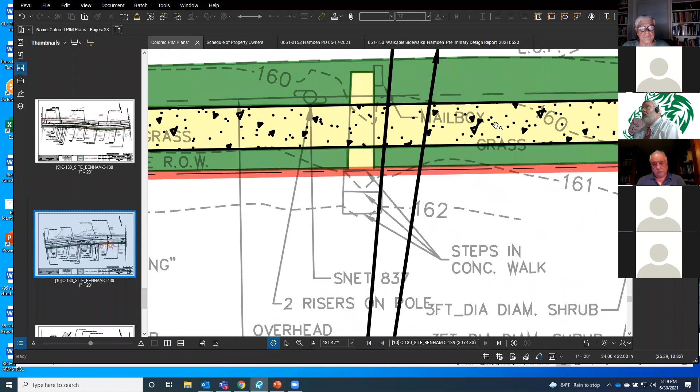How wide is this proposed sidewalk? 4 feet 6 inches is the town standard. Yeah, and I think we proposed 5 feet, because of the state funding, it's typically 5 feet. It does make it easier for a wheelchair to go by and for 2 people to pass. That's the reason why the town ordinance is 4'6", but the typical funding is 5 feet, so that's why there is a difference.

I'm just sitting here chuckling because I don't see people walking here. They don't walk, it's very seldom that you see people walking here. I just feel like this is the biggest waste of money from the state and the town. I'm sorry, but 20% is from the town, and that's 20% of taxpayers' money, and to me it's a waste of money. Not only that, I don't see anybody riding bikes here either. These bike lanes that are supposed to be so important, I just don't see it here. Maybe on other streets where there's parks or whatever, but I just don't see it here. I don't see the need for any of this.

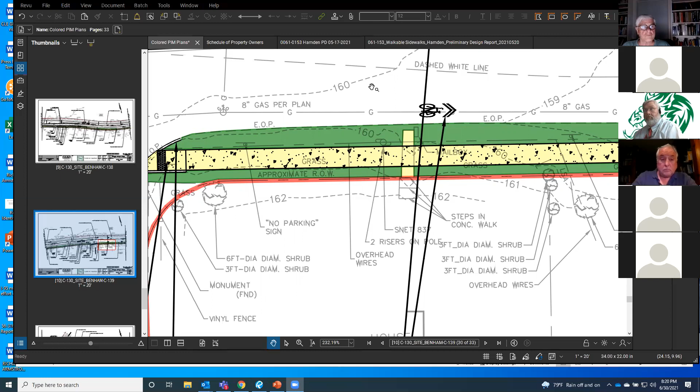It benefits more on this side - there's a crosswalk right at the corner of Mix Avenue. They could cross there to the other side and it would connect the path on Mix Avenue to the Sacred Heart side, which would make more sense. They've got the crosswalk right there already, they could cross over and walk down the Sacred Heart side. And if they had to, at the bottom of the hill you could put another crosswalk to get back to the other side if you had to. But I just don't see the purpose of disrupting 20 houses' property.

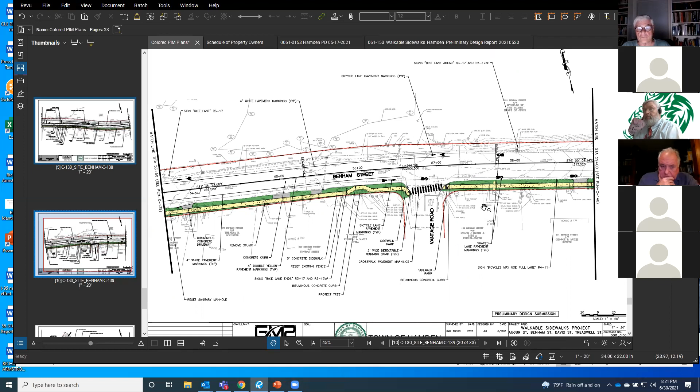I'm sorry, I have to say, and I don't think my husband is very happy with it either. He's sitting here with me now.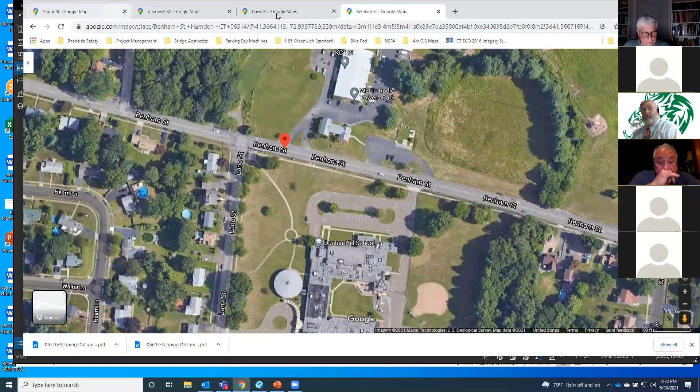Mike, I have a quick question. You're saying you're not going to be touching the vinyl fencing or the ornamental grass on our property at all, but you're going to be digging up a section and putting grass where you disrupt the area. Is that going to make the driving area on Benham Street smaller now that you're putting a sidewalk into the property, because they're going to put bike lanes on both sides? No, we're going to stay within the existing grass area on the side. There's a grass area between your vinyl fence and the existing curb - we should be able to stay right within that range. But the actual street is now going to be narrowed because now you're going to put bike lanes on both sides, 5 feet on both sides, right? So that's going to make Benham Street even more narrow.

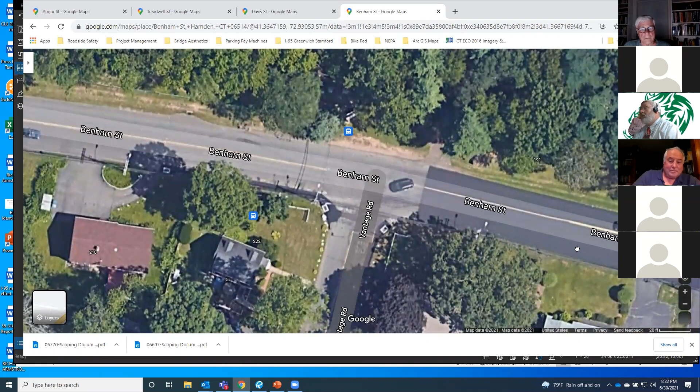It's going to appear to be narrower, yes. And that does have an effect of traffic calming, because it's statistically determined through traffic engineers that when you narrow the road and put in bike lanes, using pavement markings like we have here, it narrows the visual. It doesn't make it quite as wide or as easy for somebody to drive through. It gives a psychological effect of a narrower road than it actually is.

The other thing is, once you get below the traffic light up to Sacred Heart, there are two owners — there are literally two owners on the Benham side, one owner on the north side, because it's all Sacred Heart on the north. There are two corner houses on the Benham Street side, so there's only two owners on the south side, one owner on the north side.

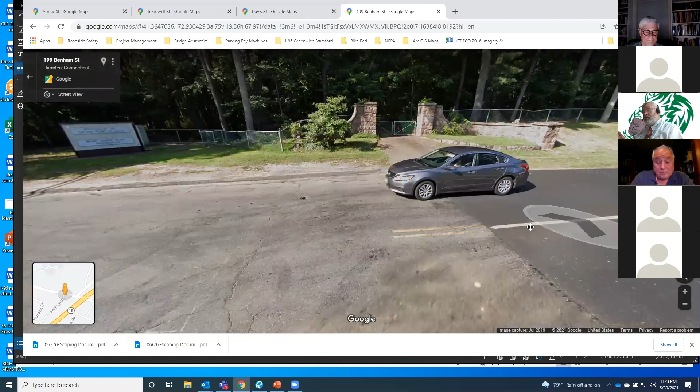Well, no — further down. I'm talking further down Benham Street, from that traffic light right down the hill, there are two owners. From the traffic light towards Mix, you're correct, there are many more. But going down the hill, there are only two.

That's where the people are. To come down Dunbar, we really debated with the design team, and they fought quite a bit about crossing at the bottom of the hill, which is where the speeds are highest. So we felt crossing at the top of the hill was much safer.

I'm also, under another grant, looking at replacing these traffic lights too. These traffic lights are slated for replacement under a Mix Avenue complete streets project that starts at the intersection near Sacred Heart, goes down to Mix, and all the way down Mix.

Yes, we understand how bad Mix used to be — they skim coated it, and I'm going to rip it up again. Then at the intersection of Mix and Skiff, I had to move that traffic light up because, believe it or not, that's actually failing. The foundation is failing, and I'm going all the way out to Shepard.

The traffic lights themselves are a $3 million project — I'm sorry, a $1.5 million project, and that's a grant. The overall Mix project is about $3.5 million.

We're chasing this continuously. I'm just hoping that you take into consideration the number of houses affected on this side, and not one house would be affected on the other side. I just hope that somebody listens to what we're saying. We are — that's why we have this.

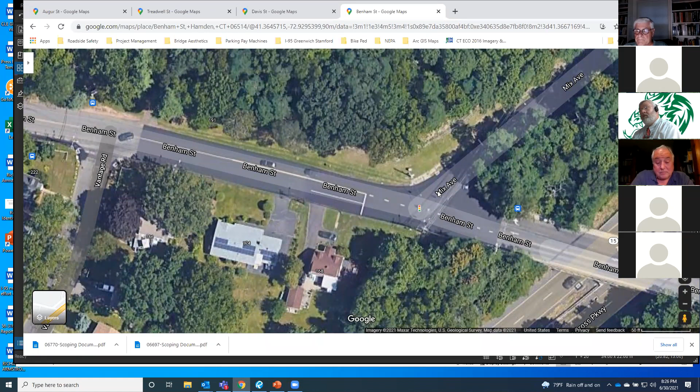So to move those poles is an expense — they're probably $100,000 poles. But the poles are all on our side, not on the Sacred Heart side. Going down the hill they're on the other side, and because of the way the slope is, there'd be retaining walls on the other side. So it actually makes more sense to be on the south side below the traffic light.

It does sound a little odd — we did take a look at that. You can see right here, looking westerly down the steep hill, the poles cross over. They're very heavy on the north side of the street, as you can see here.

So why couldn't you, at that point where there's no houses on the other side, cross over to the other side and put the sidewalk there? That's an option — we looked at that as well. I think you make very good points when everybody talks about the sidewalks being a physical impact. That's legitimate — that's your perspective, and it's completely legitimate.

I don't want to speak for other people who aren't on the call, but a lot of people would view a sidewalk as a positive impact, a facility where they walk out their driveway and get on the sidewalk. No one has said that this evening, but I think others view it as a positive. I'm not negating your perspective as a physical impact, I'm just trying to counter that many people do view sidewalks as assets. I did receive one of those letters on the previous discussion, but I don't remember the address, so I haven't brought it up, just to be fair to that person.

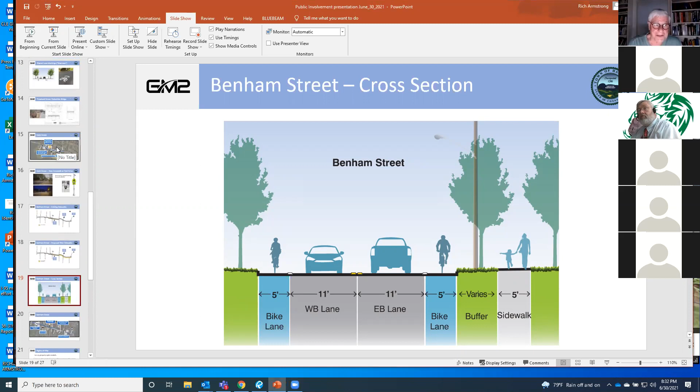Going back to Davis Street again, I do think this is dangerous, there are quite a few pedestrians because it's the only bridge in the area across Lake Whitney. I think it's important to have a sidewalk, whichever side it's on, because we have a fair amount of pedestrian traffic and they're walking in the road. I don't know what the result will be, but I think you have to do something here.

So if nothing else, we have one piece of consensus. We need a sidewalk. That's a plus. I'm going to at least bring one positive side: Davis Street needs a sidewalk and needs calming. I think we're all in agreement there.

I hope. So can I ask Mike, I'm thinking about Roger's property and the very lovely sidewalk and driveway area that you have there. It really does fit into the landscape of the neighborhood. Is there any possibility of thinking about the materials and their fit with the era of the houses, or are we talking only about concrete?

You may be aware that my house is a historic property, an antique house built in 1816. Many of the other properties on the street are old, and I think it would be worth consulting with the Historic Commission to ask for some help matching appearance here. This is a long-term investment that the town would be making, and I think not just in terms of property value, but also public enjoyment—what it feels like to walk through and into the neighborhood and approach the park, and also maintaining the historic character of some of the homes. So I would appreciate it if the engineers could consult with people who have historic expertise and think about the aesthetics of it.

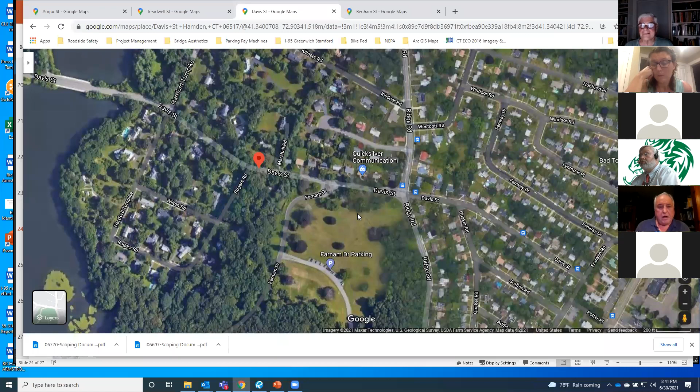Oh, thank you, so I wanted to make sure I can be respectful here. I wanted to directly speak to the nature of the foot traffic. There's a certain amount of invisibility here, I think, of the people moving from the respective bus lines on Ridge Road to Whitney. There's a great deal of traffic precipitated by the need of these bus users to figure out their way around, and I've observed them on both sides of the road all the time. I'm not going to sit here and analyze a camera, but that traffic should not be ignored.

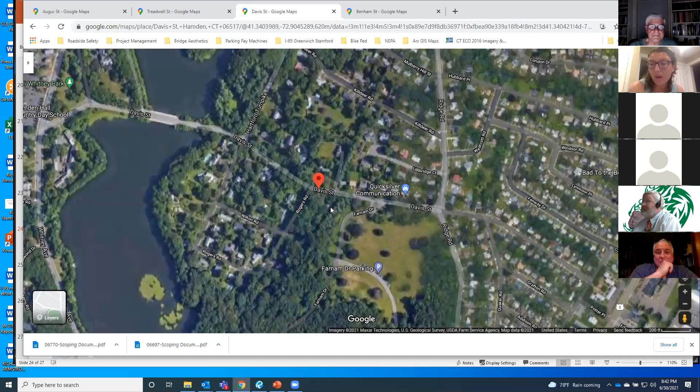But if we had the opportunity to extend what Roger has in front of his house, with the brick or the dyed, shaped concrete—I can't remember what he called it—we would be delighted to continue a sidewalk like that up from our house to the park. That would, from my point of view, enhance our property and the neighborhood. I agree with keeping it in keeping with the houses. Our house is from around 1890, and something in keeping with it, looking like a nice residential neighborhood with older houses, can affect how people behave in it.

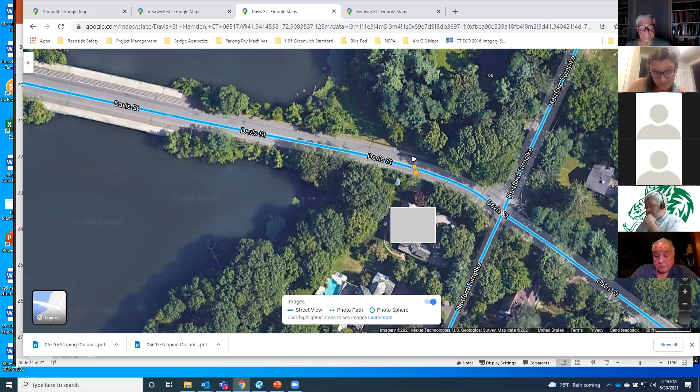I just wanted to ask about one little stretch that would solve my problem while we're waiting around for whether there can be a stoplight for pedestrians at Hartford and Davis. If you're on the south side of the bridge, crossing from Whitney, there's a short stretch covered with weeds, a bit on an incline. I've tried to wade through those weeds so I didn't have to cross, do you see what I mean? So I could take the right without dealing with the light. Do you get where I mean?

Is it you're over the bridge right now? If you're talking about the bridge itself, on the south side of Davis, after the west side of the bridge? Yes, I've actually had to yell at the regional water to cut back the knotweed more than once, and I notice it on a regular basis. Okay, but I'm talking about where the sidewalk ends on the south side before you reach Hartford Turnpike.

On the south side, there's just a bunch of weeds, and you can either wade through that, which is very nerve-wracking. But if that were a sidewalk, and it's not a very long stretch, people could turn right into that wonderful area for walking without having to deal with the crosswalk. Down the road, I hope you will do a stoplight, but I know that will take some time. But if you could just add that little stretch, it would be great.

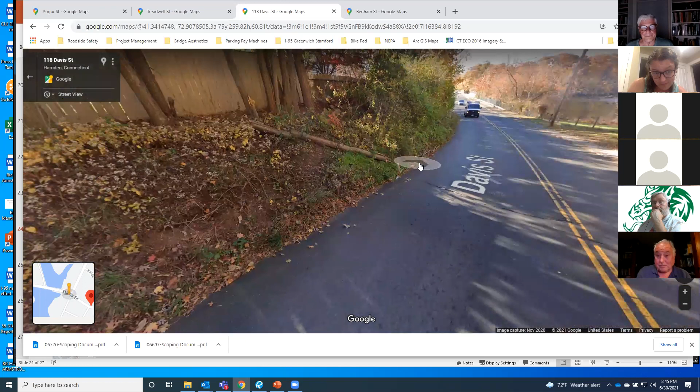If you should go look at it, it's from the bridge to Hartford Turnpike on the right as you're headed from Whitney to Hartford Turnpike, so that you can make a right turn without ever dealing with the light if you're on foot. It would make a huge difference.

Are folks able to see the screen I'm managing? Can you see? I think I'm in the right area. Yes, I believe that's the area she's talking about. Okay, there's quite a steep slope. There's some fences and possibly some retaining walls at the top of the slope as well. Very good. The sidewalk does dead end though, doesn't it?

Even if it was a little path, it would make a difference. It's not a trivial job because it's such a steep slope, you can see why it's nerve-wracking to walk on that side. So then you have to cross, and cross again, or start on the left and cross that scary intersection with people coming down toward Whitney over that hill, and you're risking getting hit. So it's just that little stretch that would be so nice. That's all I have to say.

No, exactly, you can't walk that stretch, you have to... no. And yet it would be lovely if you could, because then you'd avoid all that danger. And it's such a beautiful neighborhood to walk around. I do it all the time, but it makes me nervous. So that's all, thank you.

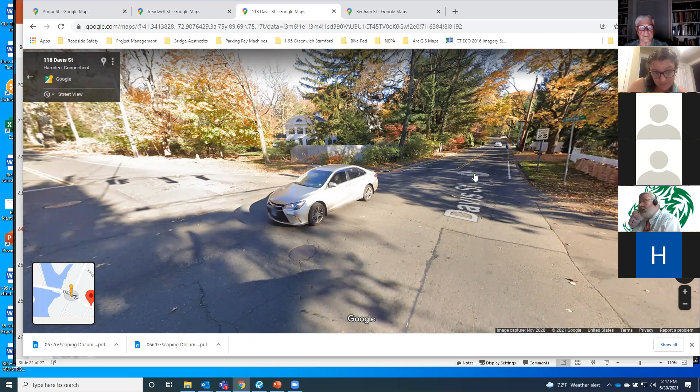Yep, I'd have to take that under another project because at the moment I don't have anything for that. I'm just trying to connect sections at this point. It's currently outside the limits of the project that the state has agreed to, and the other thing that really drove us to putting it on the north side is that Ridge Road already has sidewalks, and that's a big draw down to the park. Hartford Turnpike doesn't have sidewalks in this stretch, but Ridge does. So by bringing it from Ridge around the corner straight to the park, it's a collector and brings everybody to the park. This was publicly vetted previously in a previous report, and that's where the majority of people are theoretically coming from.

Yes, I am listening to what everyone else is saying. Maybe I can come out and bushwhack my way through there. I would strongly recommend you contact the owner before you walk onto somebody else's property. I cannot give permission to anybody to do something on somebody else's property. I just can't do that. I'm sorry.

Hey Mark, this is Josh Charco, if I may speak again. Yes, please. I just wanted to reiterate what Johannes said about people's safety being truly the most important thing here.

Although most people in Hamden live north of Davis Street, the destination is the park, and the most logical place to cross to get to that property is where there are already traffic lights with a walk signal. The lights turn red in both directions, the walk signal turns white, and you cross. If you cross at Hartford Turnpike and at Ridge Road, you are safely crossing at a light versus a crosswalk in the middle of Davis Street.